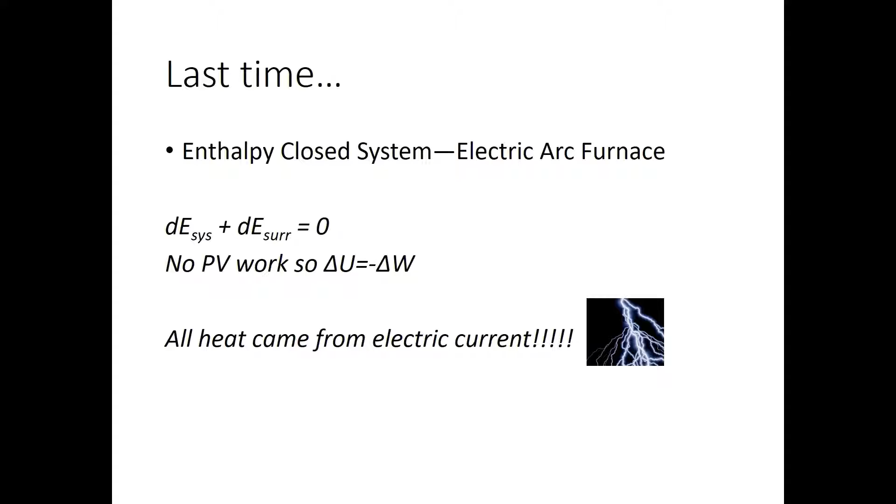One thing we were doing that wasn't quite realistic is we assumed there was no heat loss. The reason our value ended up positive is because the electricity supplied to those electrodes was essentially coming from somewhere else, so it was work being done to the system. We saw that the change in internal energy equaled negative delta W, and negative times negative is positive, which is why we're dealing with positive values. If you want to refresh this, go look at lecture number 2.

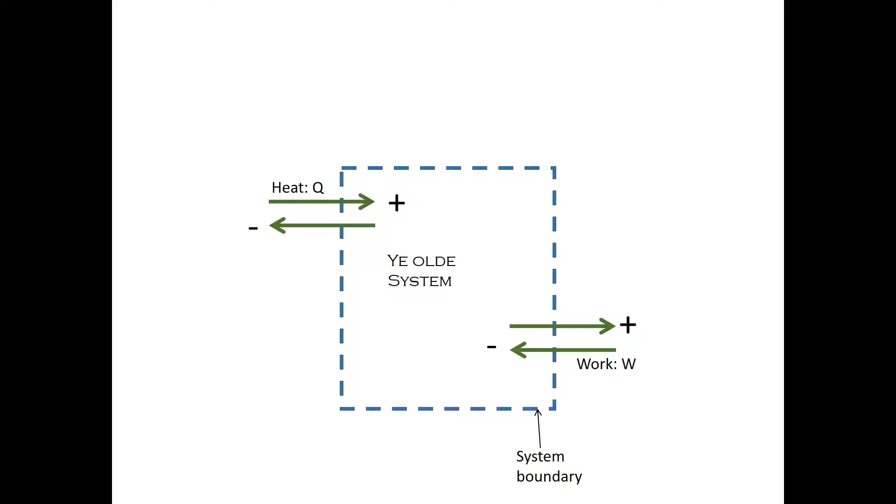So now I'm proposing we take a look at an isolated system, and I'm really happy about it. Here's a painstakingly drawn PowerPoint picture depicting a block calorimeter.

Block calorimeters are pretty important because they are how sensible heat is measured. You take a material you don't know the sensible heat of and drop it into this block calorimeter. It's an isolated system, so no heat is lost or leaves the system. All the heat goes into this device, which has a copper block with known sensible heats. So any temperature change lets us figure out how much energy went into the copper, and then we can figure out the sensible heat.

So the change in temperature of the copper block is measured, and we can calculate the sensible heat. And we're going to do that right now.

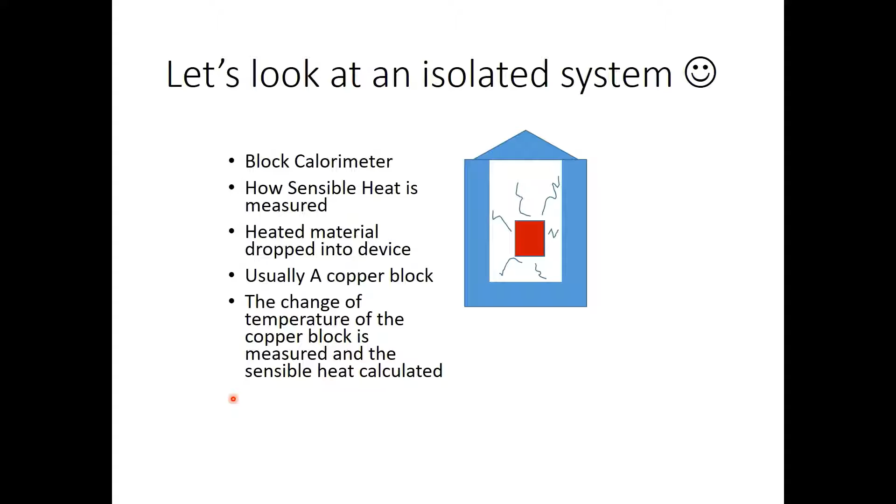So here's an example problem. We have alumina, Al2O3. In this problem, we have 1 gram of alpha alumina, which we're dropping into a well-insulated calorimeter block consisting of 1 kilogram of copper. So we know how much copper there is. The initial temperature of the alumina sample is 2000 degrees Kelvin, so we're trying to figure out what the sensible heat is of this block at 2000 K.

We put it in this block calorimeter and let it sit for a while, and the copper block rises from room temperature to a maximum temperature of 303.4 Kelvin. All the heat that was in this alumina was transferred to this copper block, assuming no heat loss. By this process, we can determine what the sensible heat of alumina is at 2000 Kelvin. To rephrase it, we want to know what the sensible heat of alumina is at 2000 Kelvin.

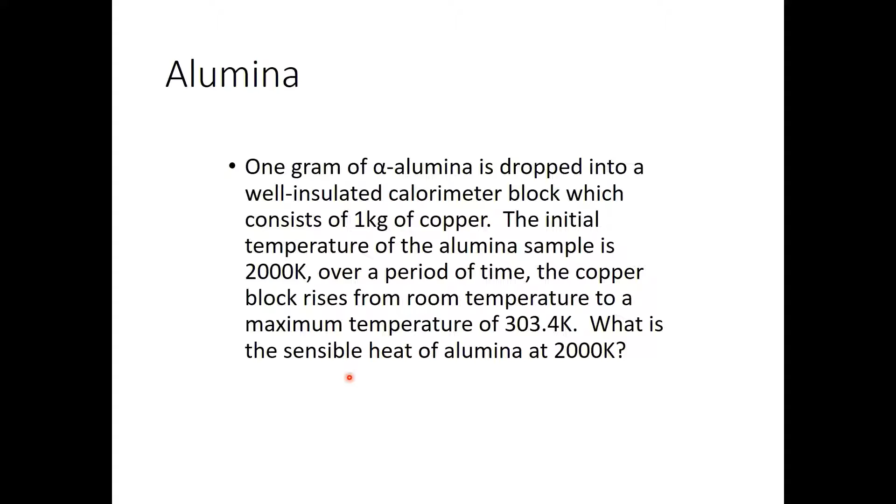This is a recurring theme: we always calculate the number of moles, and right now we're calculating the number of moles of our critical substances, which in this case is copper and alumina. We had some givens in the problem: 1 gram of alumina, and we know the molecular mass of alumina is 101.96 grams per mole.

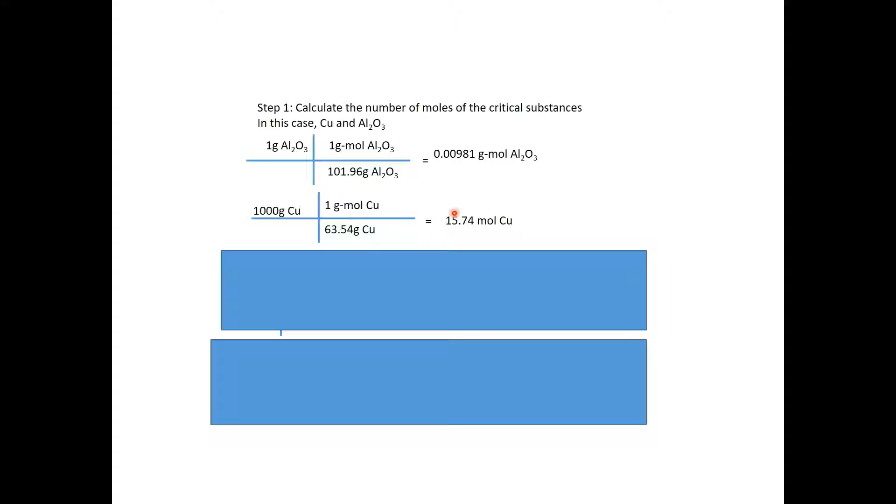We can use our railroad track method here, canceling grams of alumina to be left with moles, or specifically gram moles, of alumina, giving us 0.00981 gram moles of alumina. For copper, we were told we had 1 kilogram, which is 1,000 grams. The atomic mass of copper is 63.54 grams per gram mole, so now we know we have 15.74 gram moles of copper.

Now our second step is we want to figure out how much energy it took to raise that copper block from room temperature to 303.4 Kelvin.

From the Excel thermodynamic tool, we can calculate the sensible heat of copper using the heat capacity equation or the sensible heat equation. We can also just input 303.4 Kelvin into the table, and we get a value of 128 joules per mole. So the sensible heat of copper at 303.4 Kelvin is 128 joules per mole, which is how much energy it took to raise this block from room temperature to 304 degrees Kelvin.

We know how many moles of copper we have, so we can calculate the total heat given by this alumina block to the copper block. We multiply that by 15.74 moles, which is our calculated moles of copper, and we get a total heat or total enthalpy change of 2014.72 joules.

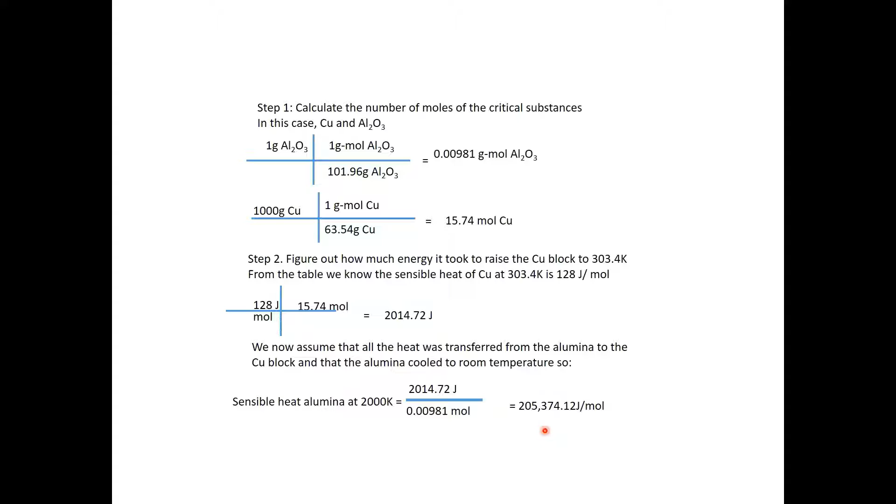So now we can assume that all the heat was transferred from the alumina to that copper block, and that the alumina cooled to room temperature. Based on that, we can calculate the sensible heat of alumina as all the heat that came out of the alumina divided by the number of moles of alumina we had. So we get 205,374.12 joules per mole.

Talking about where I got the value of 128 joules for copper, I used the Excel tool. When it opens up, you can actually input discrete temperatures.

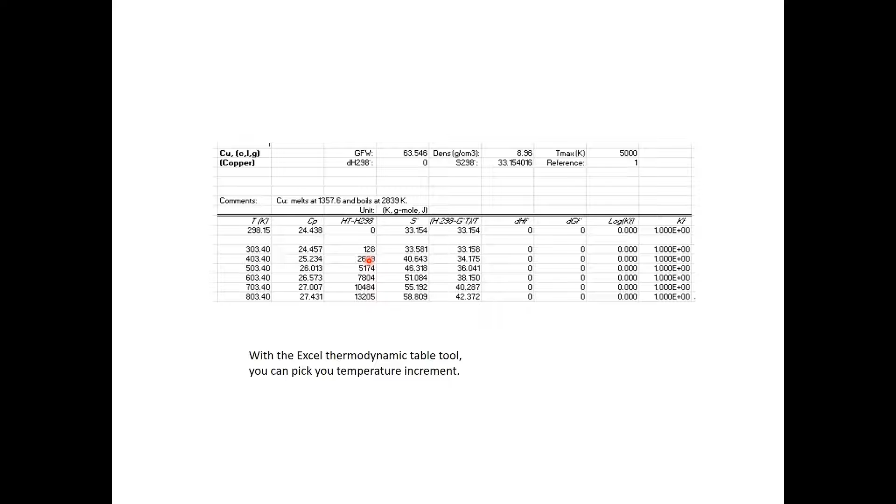So I put 303.4 and I got 128 joules per mole. And that was actually pretty close. We calculated roughly 205,000, and this is close to 210. So we're a little bit off, but it's pretty close based on our calculation, looking at the sensible heat table for alumina.

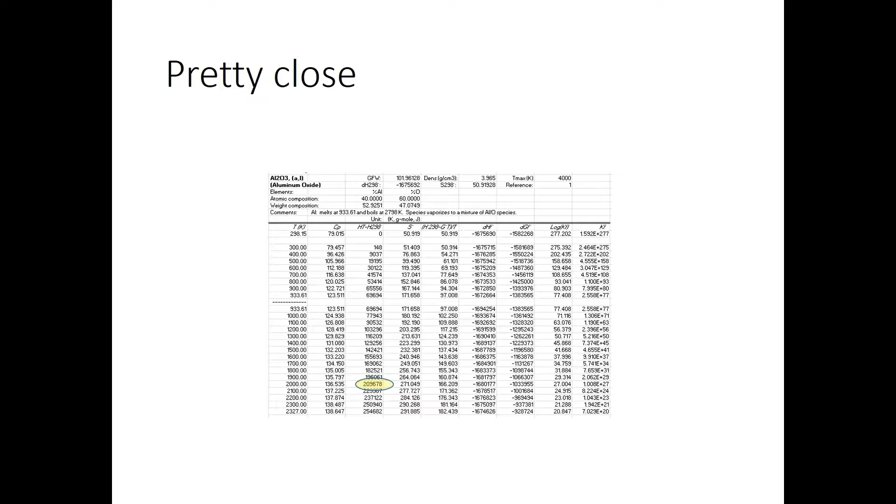The next process we're going to talk about, I have a little mistake on this slide. This should be delta Q equals delta H equals 0. I think it might be cut off or something, either that or I just typed O. It's an adiabatic process, and to give an example of an adiabatic process, we'll pose this question.

There's several metal-based additive manufacturing platforms: selective laser melting, selective laser sintering, and electron beam melting, Arcam being the company for electron beam melting. They all use small powder particles, and they essentially fuse them together with either an electron beam or a laser. So the question I'm proposing now is, how is the powder for the Arcam and other metal powder bed additive manufacturing machines made?

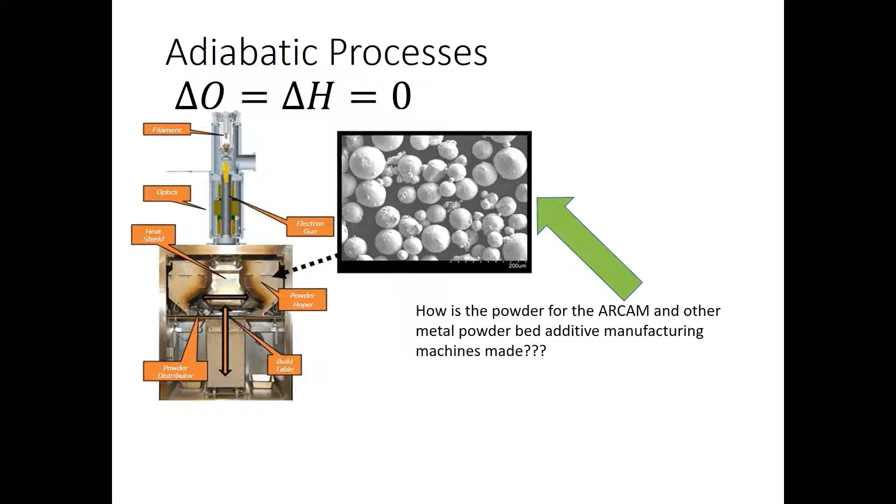It's made by a process called gas atomization. I dare say that Dippin' Dots ice cream, formerly known as the ice cream of the future, I guess the future's finally come, is made by this same process, gas atomization. In this case, we're dealing with molten metal, not molten ice cream, where molten metal flows into a stream of inert gas, which creates spherical droplets and rapidly solidifies the metal.

This is kind of an expensive process. You have to use inert gases. Argon and nitrogen in the N2 form are two common inert gases to make these metal powders. Nitrogen sometimes gives problems, particularly when dealing with stainless steels, because nitrogen thermodynamically stabilizes austenite. There's several research articles and literature on retained austenite and using nitrogen.

Before you get too excited about nitrogen, though, we're going to do a problem related to argon, where argon is essentially used as a coolant to help create these spherical droplets from a metal stream. The next problem, we're going to be making hafnium powder, an exotic metal that's finding its way into a lot of applications these days.

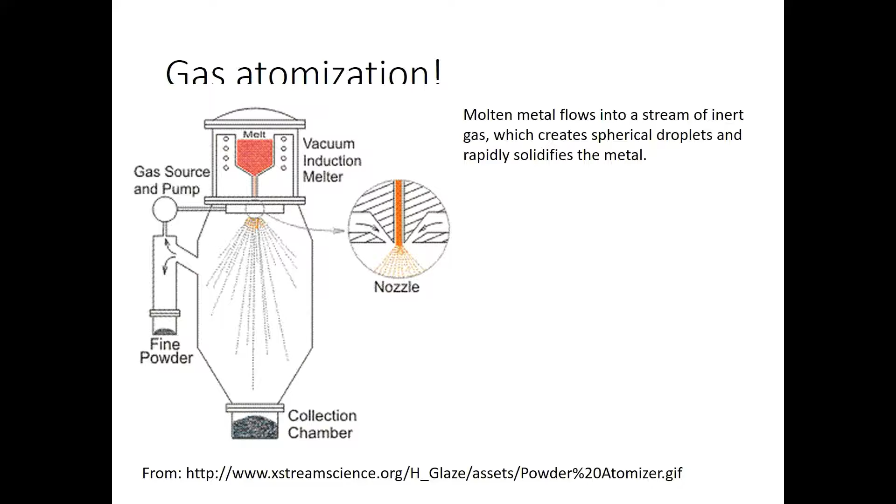So we have our problem here. There's our fictional character, Joe Additive, and he wishes to fabricate components from hafnium in his electron beam melting EBM machine. He approaches you about the production of 1 kilogram of powder. So we have some mass here.

For his experiments, the initial temperature of the molten hafnium is 2,500 Kelvin. Your atomizer uses argon to create the powder by cooling the molten stream of hafnium to form spherical particles. Your target final temperature for the powder mixture is 310 Kelvin. It's important that you don't expose hot micro powders and nano powders to air because they'll explode. 310 Kelvin is warm but safe enough not to cause an explosion.

So now our question is, how many moles of argon will you need to produce 1 kilogram of hafnium? This type of problem is pretty much a combined mass and energy balance problem. It's non-reactive, but it's a combined mass energy balance problem. We're using basically an energy balance to figure out mass. In this case, it's going to be moles, which we can easily convert to mass if we were asked. But we're using energy to figure out how much of a substance we need to carry out this metal processing process, sorry about that.

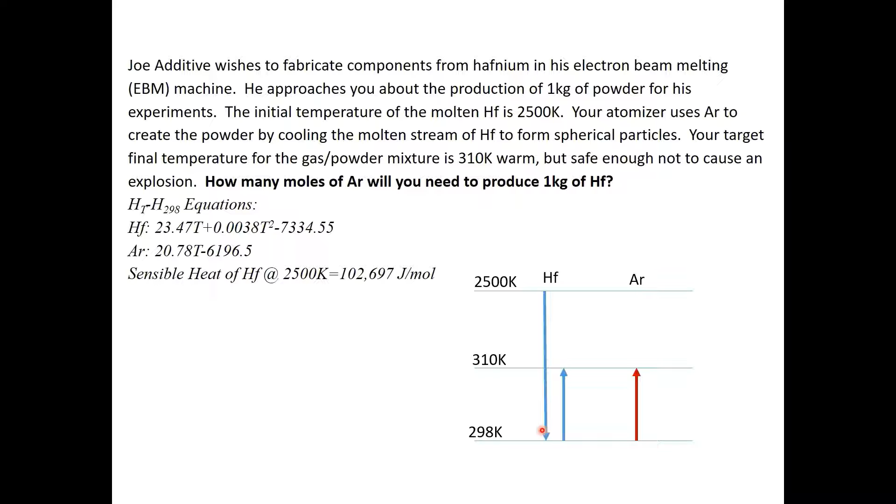We're actually given the sensible heat of hafnium at 2,500 K, so this value will be negative. We'll use this equation to figure out raising it to 310 K. For argon, we'll use this equation to figure out raising it to 310 K.

One thing we don't want to get away from is that the heat from cooling the hafnium doesn't go anywhere else — it simply goes into the argon. So there's no net heat loss; it's a heat exchange between the two components within the system.

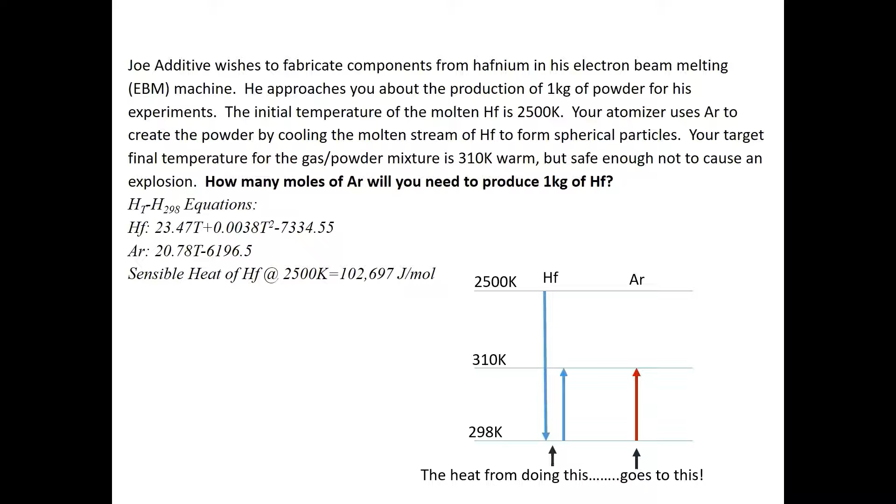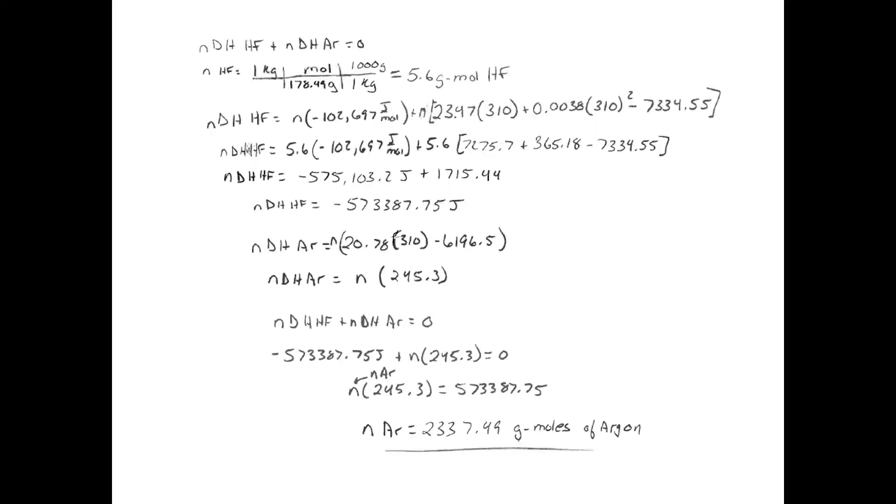So let's look at how we've worked out this problem. I'm going to add some details to help decode my chicken scratch. As always, the first step is to find the moles of hafnium. You may be asking, shouldn't we be finding the moles of argon? Well, that ends up being the end solution to the problem. So the first thing we did was figure out the number of moles of hafnium.

It was given that we were going to make 1 kilogram of powder. I did my gram to kilogram conversion here — I probably should have done it first — but we converted to kilogram moles and then to gram moles by converting kilograms to grams, so our units all work out. We end up with 5.6 gram moles of hafnium.

That's good, so we had our diagram on the previous slide. We want to first cool it to room temperature, using the sensible heat of hafnium at 2,500 K, and then raise it back up to 310, using the sensible heat equation of hafnium plugging in 310 K.

So we cooled it from 2,500 K, that's why it's negative, and then raised it to 310, that's why it's positive, taking into account the sensible heat equation given to us. We work it out and figure out that the heat required to cool this hafnium and bring it to 310 is this value, cooling from 2,500 K to room temperature.

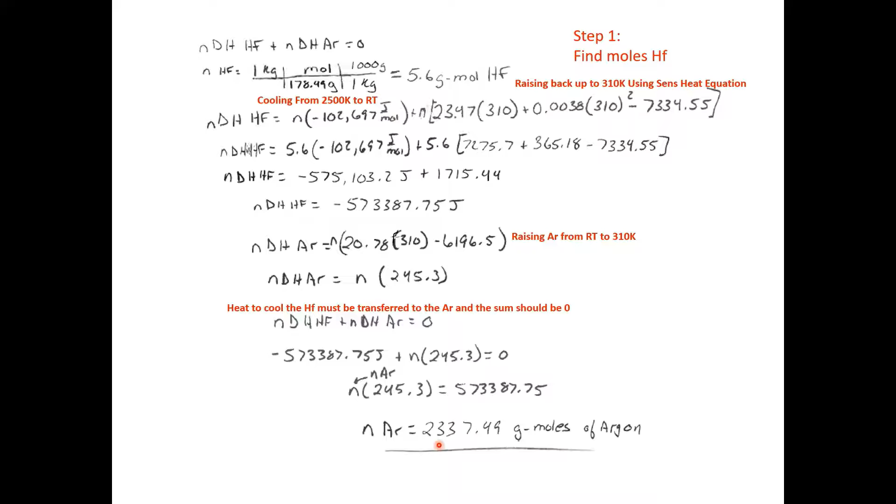Kind of to reiterate again, the heat to cool the hafnium must be transferred to the argon, and the sum of that should be 0.

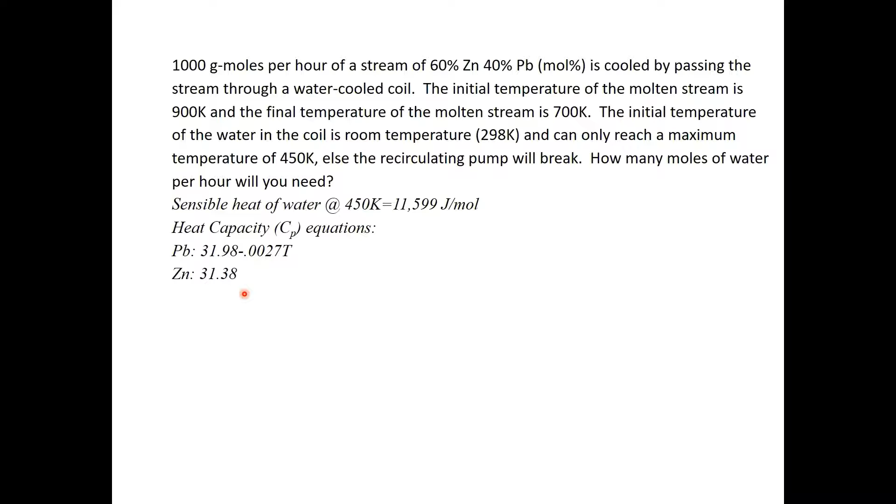I drew a flow chart to kind of help us out. Again, this is a combined mass and energy balance. It's kind of a simple mass balance because we have one input, one output. We didn't go through any pressure changes or anything like that, we're not told we did, and we're not given anything telling us there's a different flow rate on the output. So the flow rate going in is 1,000 gram moles per hour. We have our composition, 60% zinc, and we know it's molar, and our input temperature is 900 K. Our output is the same, 1,000 gram moles per hour, still the same composition - we're not doing a separation problem this time. But the key tidbit here is that we're lowering our temperature to 700 Kelvin, and that's kind of important in our calculation.

How is this cooling? Where's the heat going? Well, the heat's going into water. The moles per hour is basically dictated by this maximum temperature our water can reach. So that's why it's very, very important. All the heat from this incoming flow of zinc and lead is going into this water. There's a limit to how hot that water can get, so that is what dictates our moles per hour. And that's how we're going to go about working out the problem.

I've also done a kind of another thermal diagram. I find these to be very helpful again. So the first process we're doing is cooling our mixture to 700 Kelvin. To do that, we have to start at 900, go down to 298, and then raise it back up to 700 K. We're not using sensible heat, so we don't really have to go through this rigmarole. I'll show you one of the beauties of actually integrating and doing the heat capacity equation on the next slide. The other thing we're doing is raising water from room temperature to 450 K. We don't have to do anything but pay attention to the sign, and it's 11,599 joules per mole, the sensible heat of water at 450 K. So we're just going to raise it up.

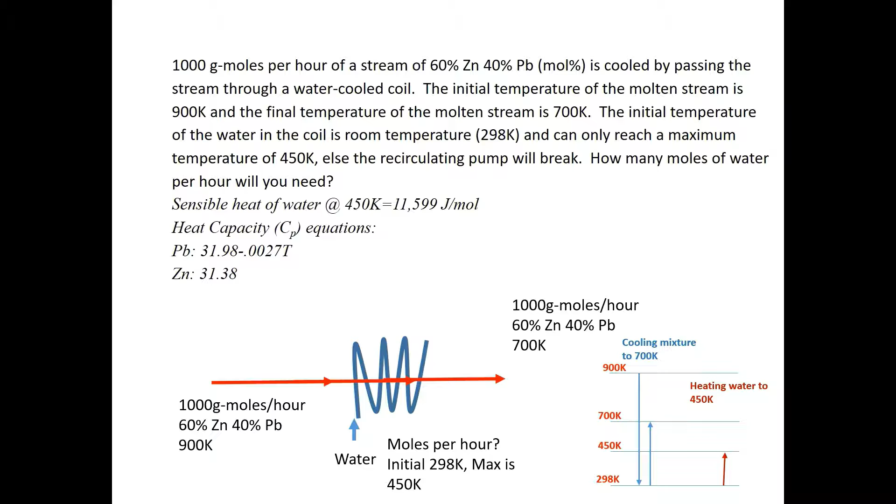So let's take a look at how we work this out. All right, so here is how we worked out this problem. The first step is going to be a pretty common step, kind of a recurring theme, as I've said before.

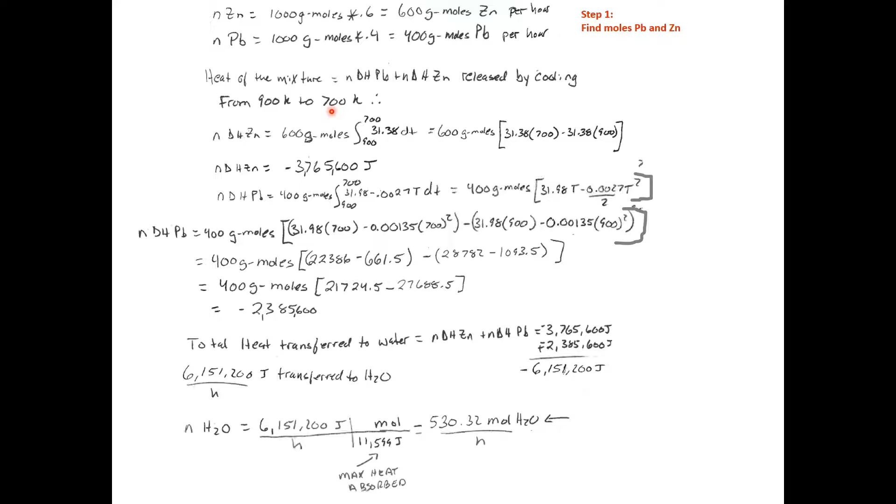Step one, we're going to find the moles of lead and zinc. We were given a basis of 1,000 gram moles per hour, and we know it's 60% zinc, 40% lead. So that means we have 600 gram moles of zinc per hour and 400 gram moles of lead per hour. The heat of this mixture, I kind of talked about it - the heat's going somewhere. We're cooling it from 900 to 700 K, so this heat's released, and that heat goes into the water. Step two, we want to figure out how much the change in heat was from cooling this mixture from 900 Kelvin to 700 Kelvin. I'm using heat interchangeably with enthalpy.

One of the beauties here is that we don't have to pay respect to room temperature because we're not doing sensible heat. We can integrate over the interval 900 to 700, and the math works itself out for us, so we don't have to arbitrarily put a negative sign.

So integrating from 900 to 700 of our sensible heat equation gives us a negative value, and we're also multiplying it by the number of moles. So it's the number of moles times the change of enthalpy for zinc, and that gives us 3,765,600 joules. We then do the same thing for lead, integrating from 900 to 700, and again the math takes care of itself and gives us a negative sign.

I'm going to get to this next part. The total heat transferred to the water is the number of moles times the delta change in enthalpy of zinc plus the number of moles times the change in enthalpy for lead. We add these together and we get negative 6,151,200 joules. If you notice though, I've highlighted this.

We want to say that 6,151,200 joules is transferred to water. So it's heating up the water, it's going into the water, so it's positive. I made a little reminder: it's positive because we heated it up, negative because we cooled it. When we use it to complete our calculation, we use it as a positive value.

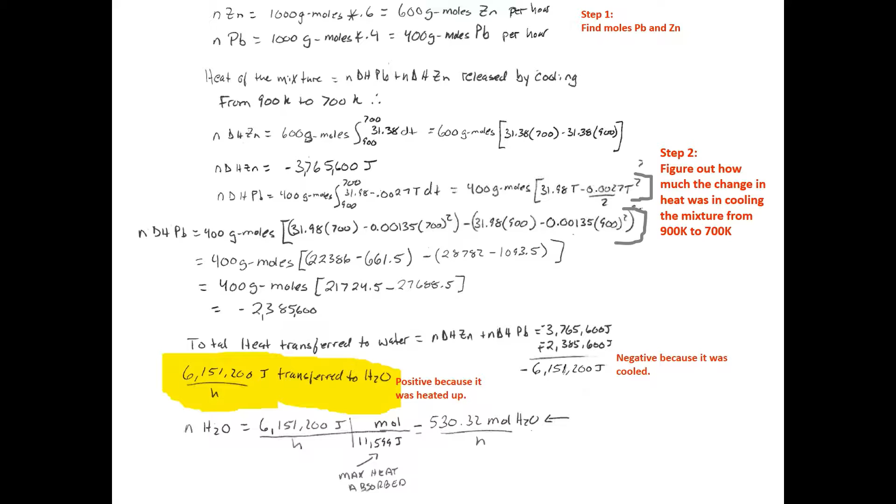Another problem, and this is the final problem we'll work out today, is another zinc refining problem. We're not going to do the chemistry part, we're going to just do the mass and energy balance part.

Zinc can be refined by reacting zinc and carbon monoxide to form zinc vapor, carbon dioxide, and carbon monoxide. So we react zinc and carbon monoxide to vaporize zinc, with carbon dioxide and carbon monoxide as byproducts. Again, we're not focusing on the chemistry part. This is still non-reactive energy balances, specifically a non-reactive combined mass and energy balance.

We're feeding this gas to a condenser to get the zinc out, condensing it into a liquid stream while the other two gases leave in a separate gas stream. To aid in the condensation process, some of the liquid zinc is recirculated back into the condenser — to repeat myself, to aid in the condensation process. Not the best written problem, I apologize.

Given the temperatures on the flow chart, please calculate the amount of zinc which must be recirculated to make everything work out. I left the values off of this slide for brevity. Let's take a look at the flow chart.

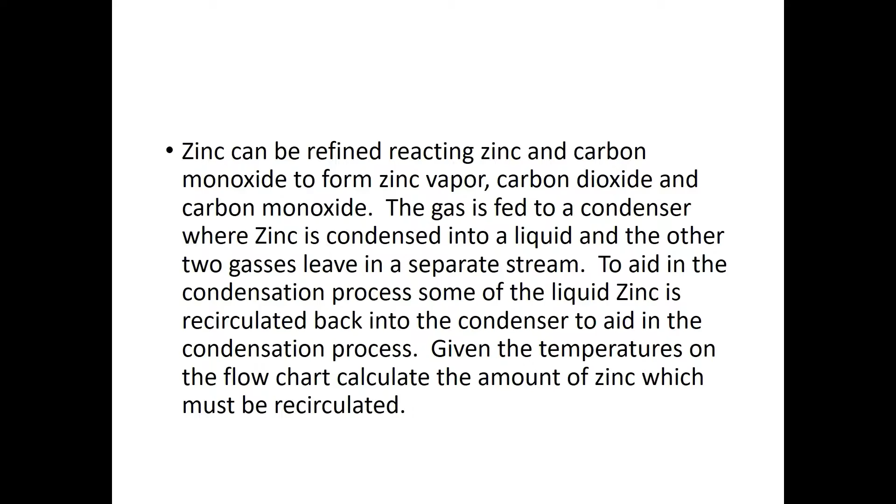All right, so looking at our flow chart again, this is a combined material energy balance. We're looking at zinc refining. We have this input gas that's 28% zinc, 62% carbon monoxide, and 10% carbon dioxide, given to us in mole percent. We know our input temperature is 1550 degrees C. Instead of assuming a basis, we're given a basis of 20 metric tons per hour of zinc.

The condensed zinc comes out at 525 C, as does the gas. This zinc goes off somewhere else and gets cooled further, and some of it's recirculated back at 440 degrees C, but we don't know how much is recirculated back, and that's what we need to calculate.

If we look again at our thermal diagram, we're cooling our mixture from 1550 C to 25 C, so that tells us we're definitely going to be using sensible heats here. We're going from 1550 to 525, but to get there we have to take this roundabout path: first cool it to room temperature, then raise it back up to 525 C.

The recirculated zinc, we know it's coming in at 440 C, and we know it's going to go back up to 525 because it's going to come back out with this condensed zinc. So first we have to drop it to 25 and then raise it to 525 C. We just have to figure out how much of this recirculated zinc we have to put back into the stream to make this process work.

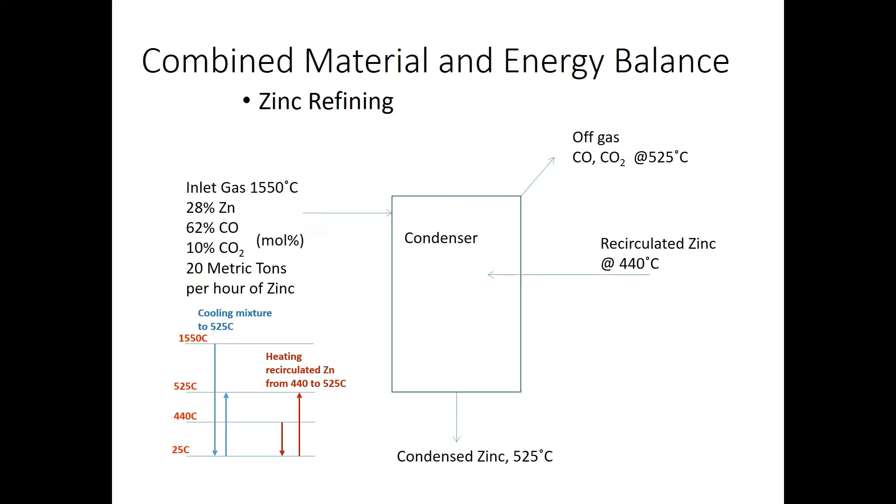Here's my calculation, and again I'll decode it. Step one is always find the number of moles, and in this case our constituents are zinc, carbon monoxide, and carbon dioxide. We were given our basis, so everything hinges upon this basis.

20 metric tons per hour, spelled this way as metric tons. There are 1,000 kilograms in 1 metric ton. The atomic mass of zinc is 65.38 kilograms in 1 kilogram mole of zinc. I got 305.9 kilogram moles of zinc per hour.

Again, for these processes we're working in the gram mole, so I multiply it by 1,000, giving 305.9 times 10 to the 3 gram moles of zinc per hour. Remember this zinc is in a gaseous state, so we can say it's acting as an ideal gas, and use this molar ratio to calculate how many gram moles of everything else we have.

So we use the same basis. We use our 28 to 62 ratio of zinc to carbon monoxide to get this many gram moles. Feel free to rewind to look at the flow chart to see where I'm getting these numbers. We did the same thing again for CO2, using a 28 to 10 ratio of zinc to CO2, and got this many gram moles of CO2.

I made my own handwritten table. I converted from degrees centigrade to Kelvin, and then got the sensible heats off that Excel sheet for every constituent. The key temperatures were 1550 and 525 C for zinc, carbon dioxide, and carbon monoxide, because we cooled everything from 1550 to 525.

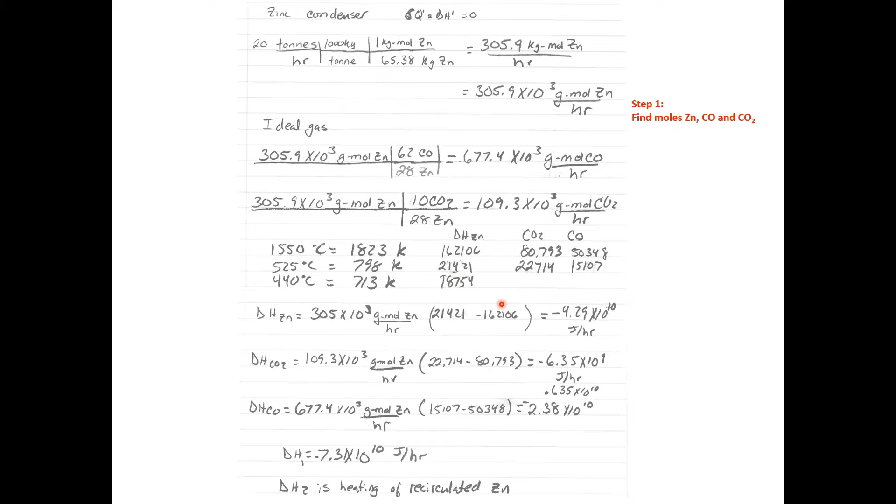So step 2, we're calculating the cooling to 525, going through that Kirchhoff loop process. So we calculated the heats for cooling all of our constituents to 525 C, then add it all together. The total heat of cooling all of our substances to 525 C is negative 7.31 times 10 to the 10 joules per hour, and remember it's cooling, so that's why it's negative.

This is the enthalpy of cooling the mixture to 525 degrees C, or 798 degrees Kelvin. We then have to figure out what our delta H2 is. Our delta H1 plus delta H2 should equal 0, because this is again an adiabatic process, so this heat that was given off needs to go into heating the recirculated zinc. How do we calculate that?

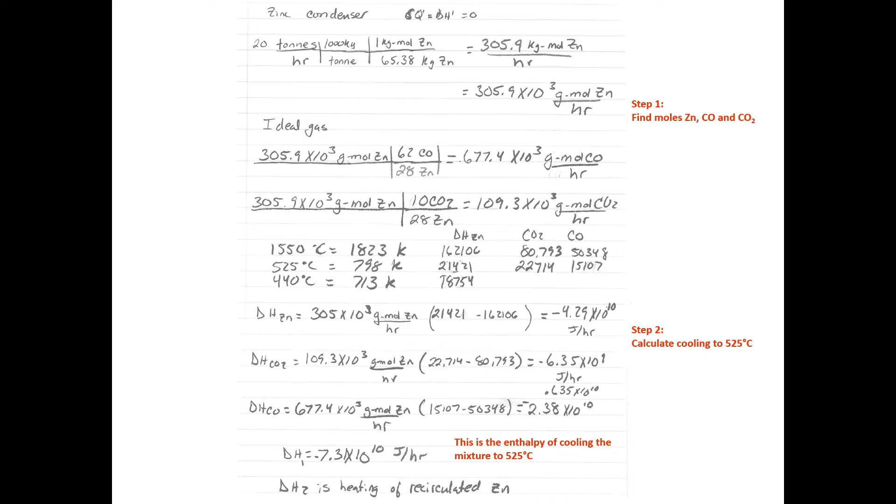This way, I copied my table and brought it over here. The entering zinc is going from 440 to 525 degrees C. From a sensible heat point of view, it's going from 18,754 joules, which I got off my little table, up to 21,421 joules. That's 440 to 525, or 713 to 798 Kelvin.

Again, we drop it to room temperature first, that's why it's negative, and then we raise it up to 525 degrees C, so that's why it's positive. I did this one a little bit backwards, but that's the heat of raising it from 440 to 525.

This value plus our delta H1 should equal 0. Our delta H1 from the previous slide was negative 7.31 times 10 to the 10 joules per hour. So number of moles times this heat, which we got by subtracting this value from this value, should give us 0. We can then move our delta H1, the heat of cooling the entire mixture, over to the other side of the equation and solve for number of moles of zinc. So we have 2.7 times 10 to the 7 moles of zinc per hour as our answer.

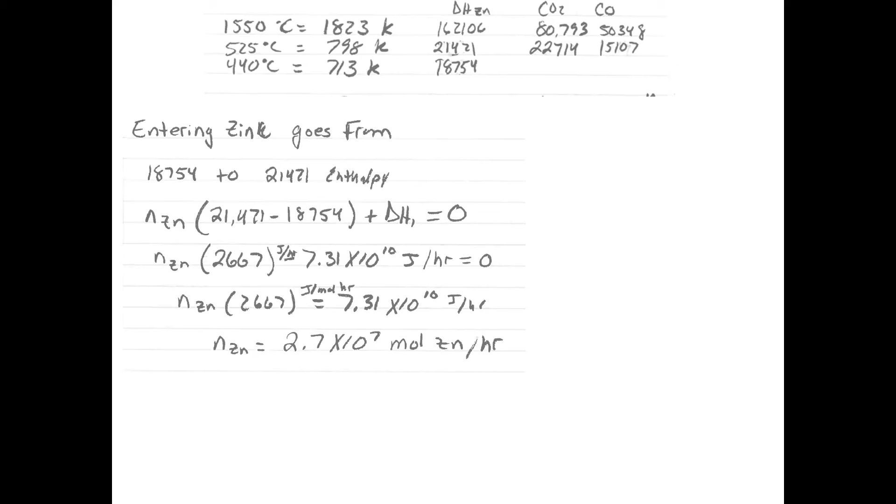This is based on the fact that the recirculated zinc cannot get hotter than 525 degrees C. That's because it's going back into the condensation stream, and we were told in the problem that the condensation stream exits at 525 degrees C, or 798 K.